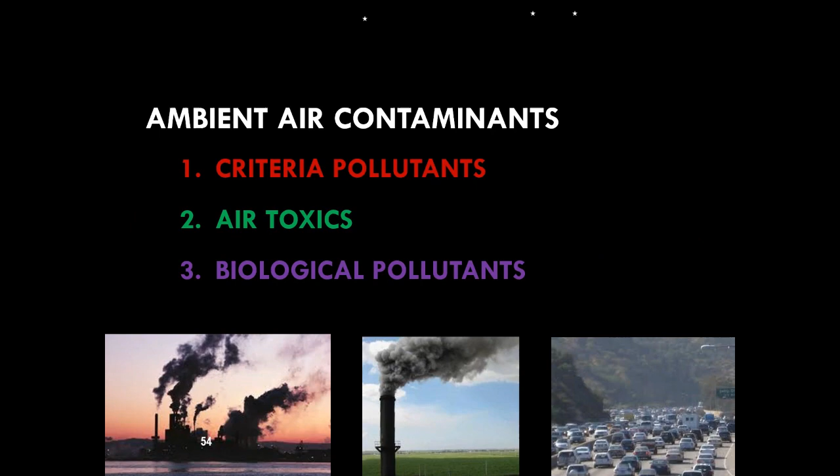So criteria air pollutants, these are air pollutants that have been regulated and are used as indicators of air quality. They are generally widely distributed across the country. So we have carbon monoxide, lead, nitrogen dioxide, ozone, particles or total suspended particles or TSP, and sulfur dioxide. So these are the indicators of air quality here in the Philippines.

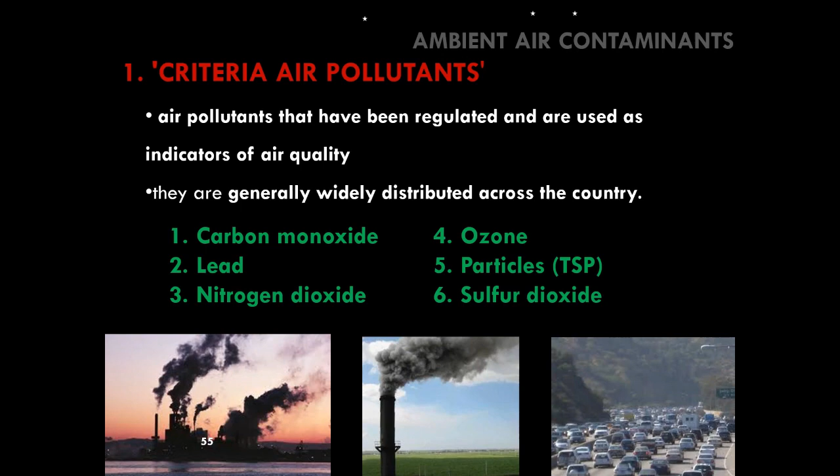Now, how do we describe particulate matter? So we know that human hair has a very small diameter, so it is actually 50 to 70 microns or micrometers in diameter. Also, fine beach sand has a 90 micron diameter. Now, we have two types of particles. We have PM2.5 and we have PM10.

So, PM2.5 are combustion particles, organic compounds, metals, etc. It has a diameter of 2.5 microns or less. While PM10, or particulate matter 10, are those of dust, pollen, mold, etc. Those have 10 microns in diameter.

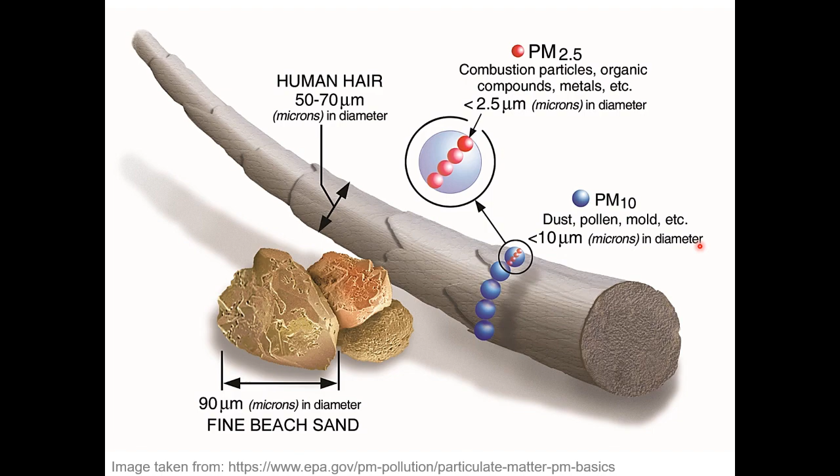So we also have air toxics. This is referred to as hazardous air pollutants. It can lead to an increase in the incidence of cancer, birth defects, genetic damage, central nervous system defects, immunodeficiency, and disorders of the respiratory and nervous system.

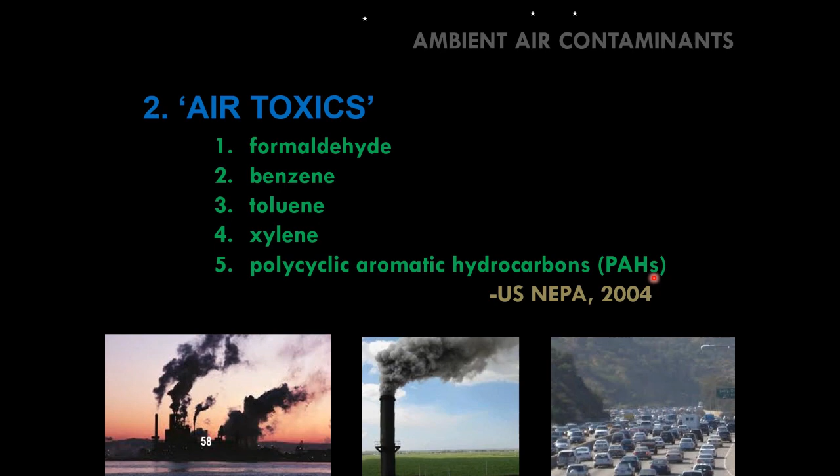So I've mentioned a while ago how sulfur dioxide can also cause irritation to the lungs as it forms sulfuric acid. So this is also an air toxic. But these air toxics are what is being monitored: formaldehyde, benzene, toluene, xylene, and polycyclic aromatic hydrocarbons or PAH. This is according to US NEPA.

Next, we have biological pollutants. So from microbiological contamination like molds, the skin of animals and humans, and the remains and droppings of pests such as cockroaches. These can be airborne and can have a significant impact on indoor air quality. So we know that molds actually can cause irritation to the nose and such.

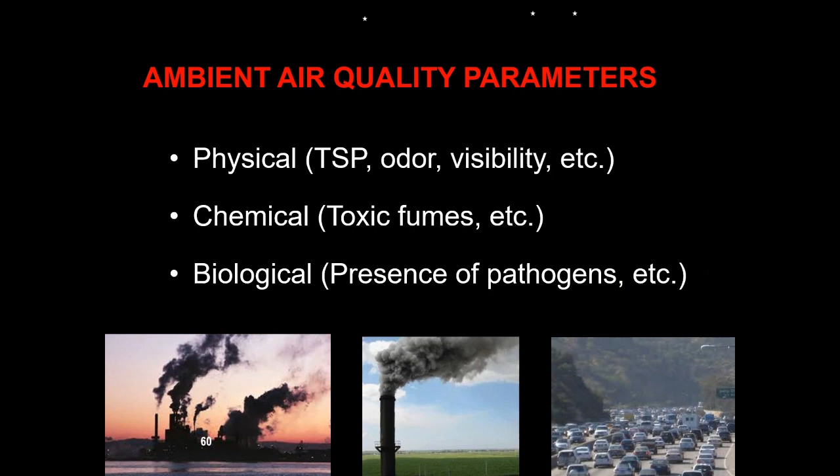So what are the ambient air quality parameters? What are we looking at when we check for ambient air? We have physical, chemical, and biological. In the physical, we have the TSP or total suspended particles, the odor, and the visibility. In the chemical, we have toxic fumes, etc. And in biological, we have the presence of pathogens. So that's it for ambient air quality parameters.

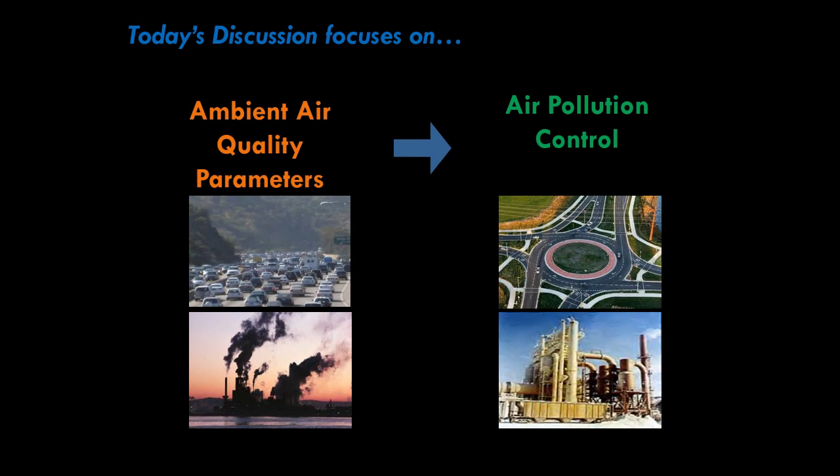Now let's move on to the control of air pollution. Most air pollution control mechanisms are designed for gaseous pollutants and particulates. So in large-scale industries, air pollution is controlled on the basis of the design. The design is based on gaseous pollutants and particulates.

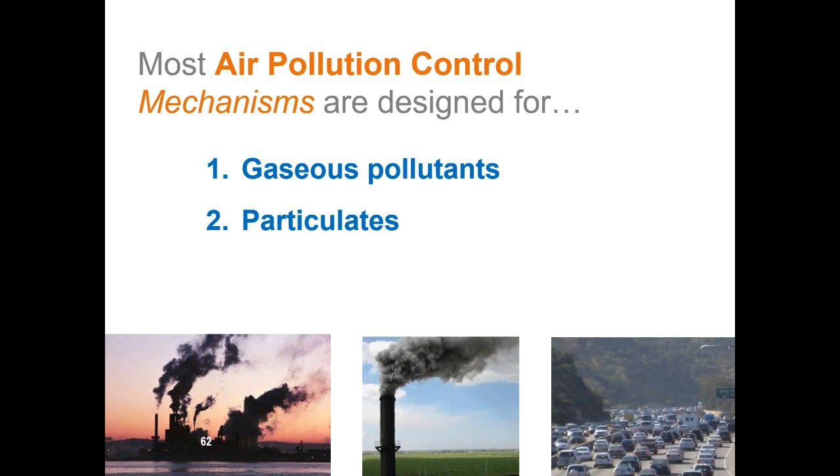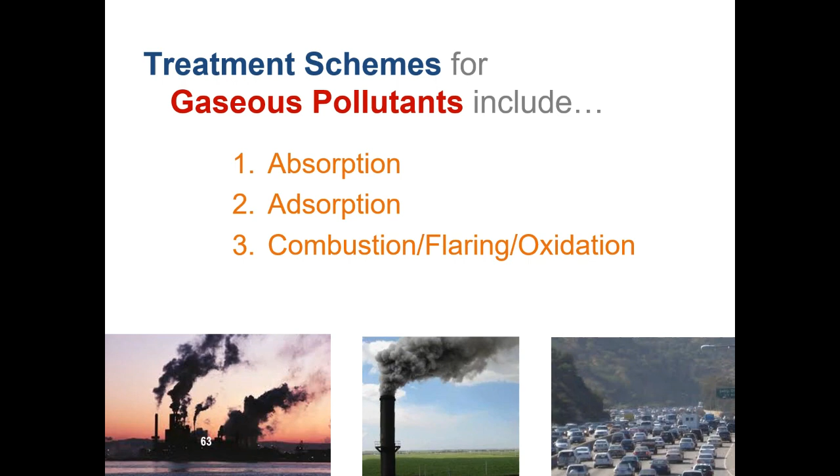So treatment schemes for gaseous pollutants include absorption, adsorption, and combustion, flaring, or oxidation. So gas absorption is a unit operation to separate gases by washing or scrubbing a gas mixture with a suitable liquid or a scrubbing liquid.

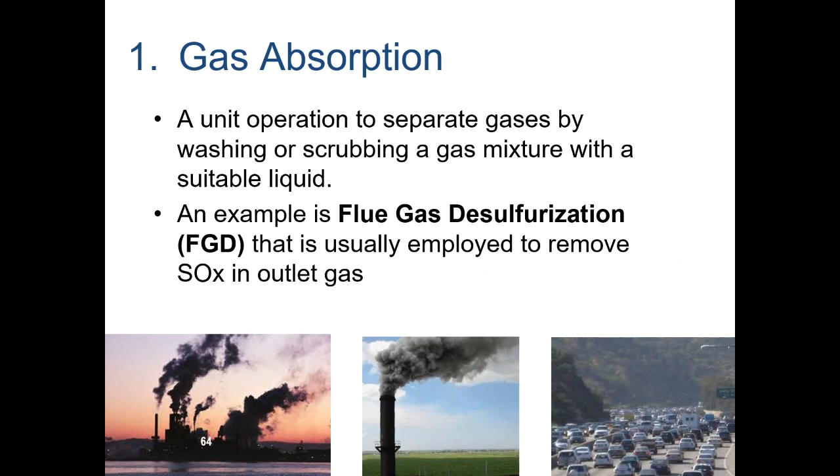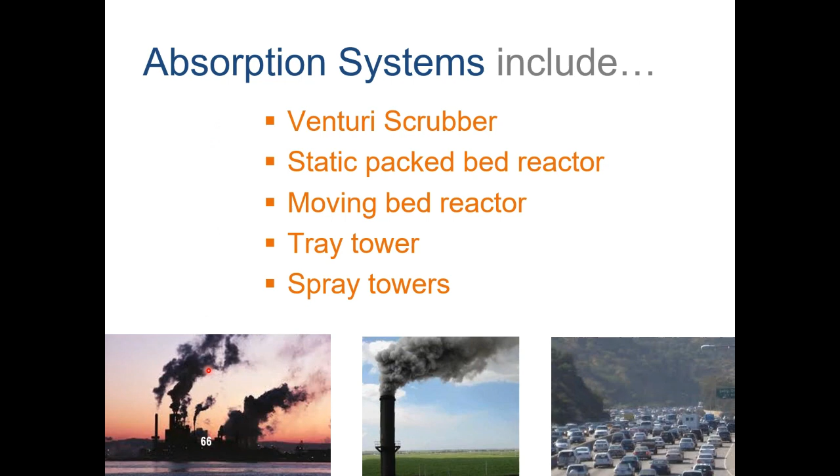So the absorption systems include the Venturi scrubber, static packed bed reactor, moving bed reactor, tray towers, and spray towers. I think you are familiar with these. You can find these in chemical industries or manufacturing plants, usually those that have gaseous byproducts. So let me show you a Venturi scrubber.

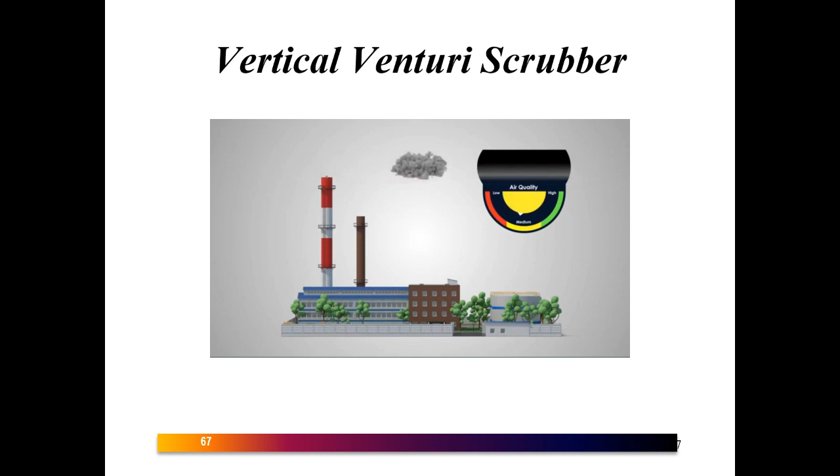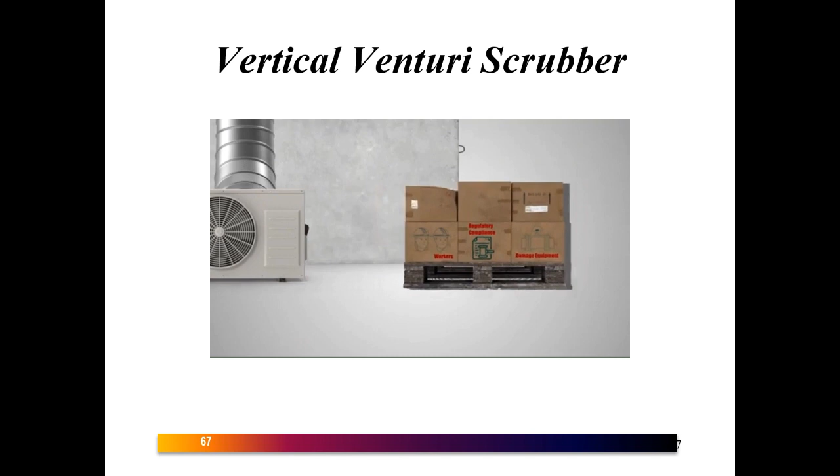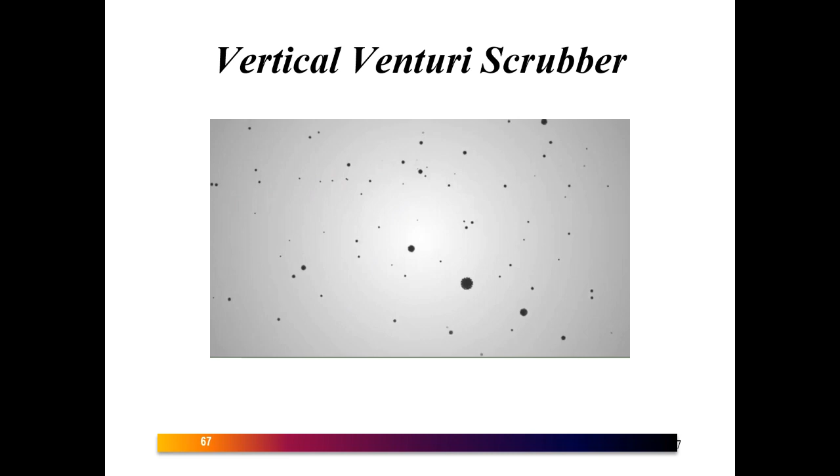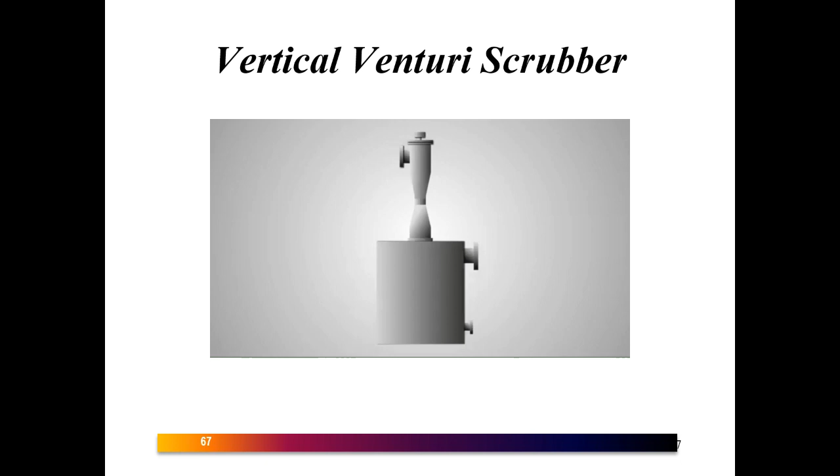Venturi scrubber. Air quality control is important to the success of every business, especially ones with industrial applications. The best way to maintain a high level of air quality is by using dust collection equipment. Dust collection equipment improves air quality in your facilities by removing harmful pollutants that can endanger workers, put your regulatory compliance at risk, and damage equipment. Air quality solutions have moved beyond typical dry dust collection, using the inherent properties of the impaction process to create wet scrubbers. Wet scrubbers rely on scrubbing fluid to remove dust from an air or gas stream. One of the most powerful and widely used types of wet scrubber is the Venturi scrubber. While Venturi devices have been used for over 100 years to measure and record fluid flow, it wasn't until the late 1940s that engineers learned to use Venturi design to efficiently remove particles from airstreams.

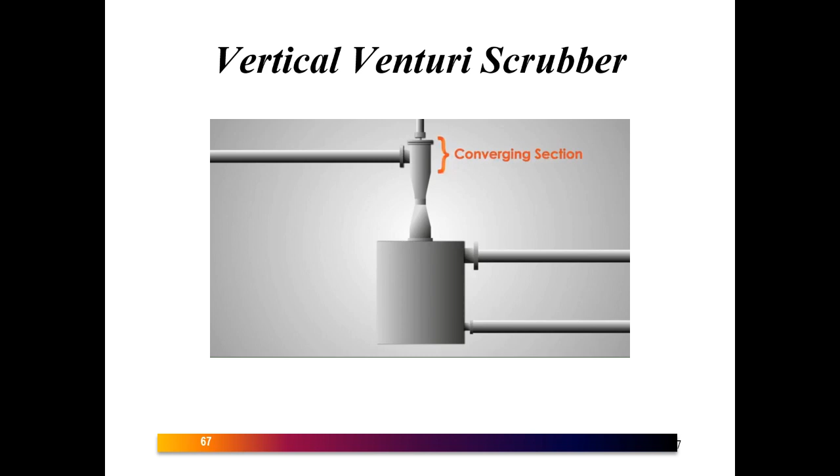Venturis are able to do so through their hydro-friendly designs. In order to clean air, Venturi scrubbers use the differential between high-velocity dust particles and free-flowing fluid such as water to create contaminant entrapping water droplets. Venturi scrubbers are designed to efficiently remove fumes, dust, solids, and aerosols.

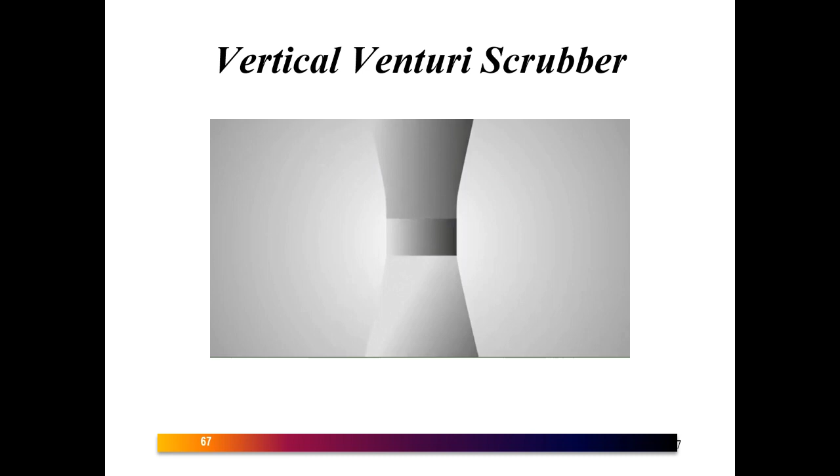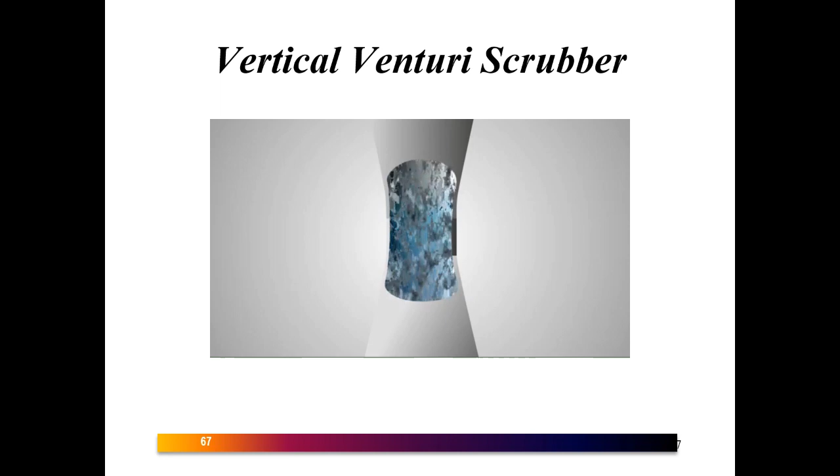The scrubbing liquid, most commonly water, comes into contact with the particulate-laden gas stream in a highly turbulent, high-velocity Venturi throat. As the droplets and particulate matter interact, they agglomerate in the diverging section of the Venturi. The entrained droplets, contaminated with the particulate matter, are removed from the gas stream by means of cyclonic separator. The cleaned gas exits the cyclonic separator, while the recovered scrubbing fluid is returned to a separate or integral tank

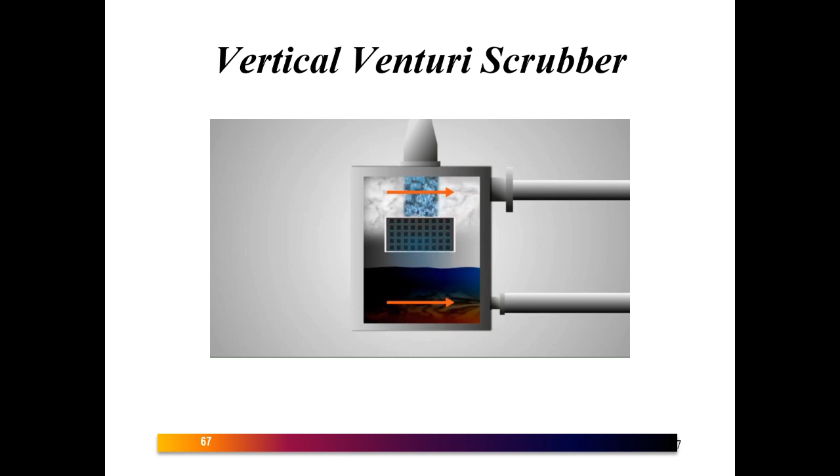for recirculation. By selecting the appropriate pressure drop, which is proportional to the throat velocity, efficiencies of over 99% can be achieved over a wide range of particle sizes. Although standardized in size and capacity, each individual unit is custom designed and engineered to meet the specific requirement of each application.

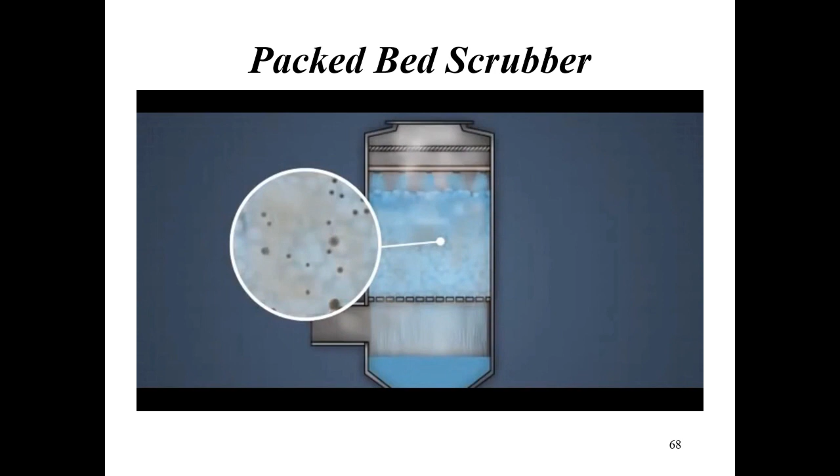As the gas passes up through the packing material, the particulate and gas molecules come in contact with the film of scrubbing liquid on the packing. The contaminated liquid drains down through the packing material, past a packing support, and out through the bottom of the tower. The gas stream flows out through the top of the packing material, past the nozzles, and through a mist eliminator before exiting the tower.

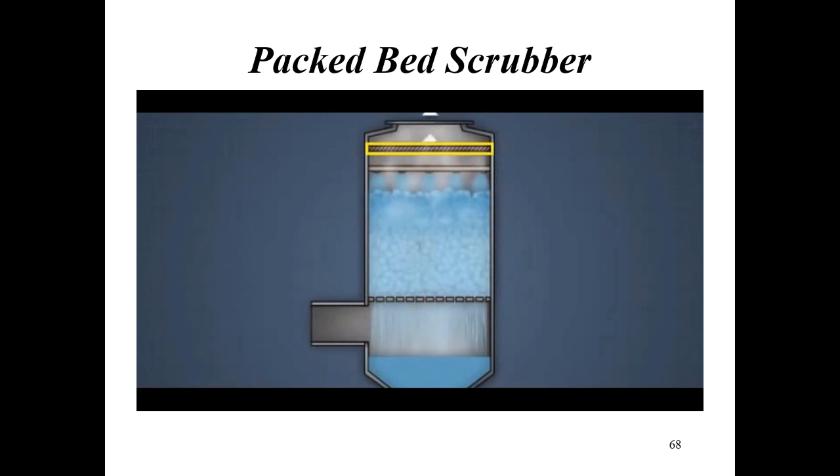So that was the packed bed reactor. Or scrubber, sorry, packed bed scrubber. So a packed bed scrubber can remove particulate matter as well as gaseous contaminants. I keep saying reactor. In a packed bed scrubber, as you can see here, there is a packing material. So this packing material also helps the gas to not only go straight, but it also traps particulates

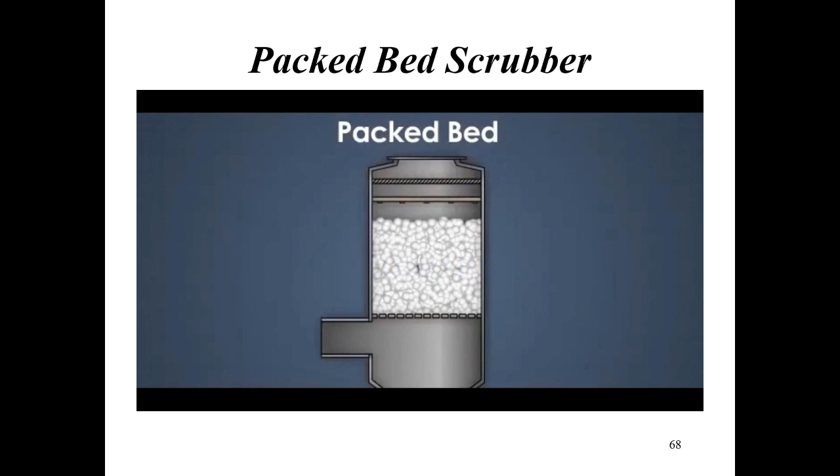in the packing material. It also creates a longer time for the gas to be soaked in the scrubbing liquid, since it has very many crevices and gas could travel in different ways through this packed bed. Alright, so that is a packed bed scrubber. So those are examples of gas absorption systems.

So next system is we have the adsorption of gases on solids. So what is adsorption? Adsorption is different from absorption. Adsorption is when particulates or any matter is stuck on the surface, only the surface, of a material. So an example would be activated carbon treatment. This is a popular air pollution control method.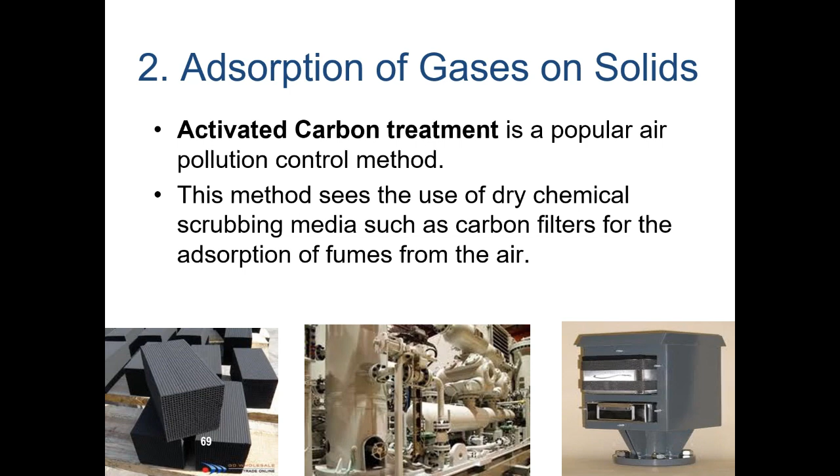So this method sees the use of dry chemical scrubbing media such as carbon filters for the adsorption of fumes from the air. So it uses dry chemical scrubbing media such as carbon filters. That's adsorption of gases on solids. So this is an example. This is a porous carbon. So vapor molecules over time, so they heat. All right. So vapor molecules go inside the crevices of a

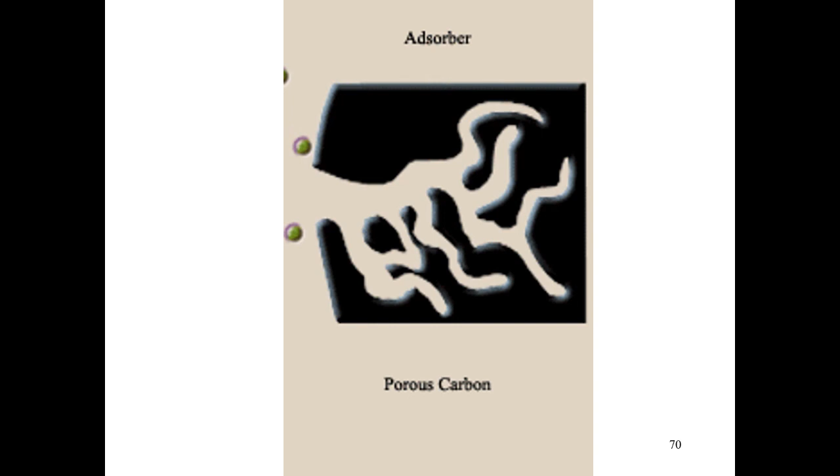carbon molecule. So the vapor also gets stuck inside, and once the crevices are full, heating the carbon is one way of cleaning it. You can also introduce steam to clean the carbon material, and it is ready to be used. So unlike absorption with the use of liquid scrubbers, this could actually be used again.

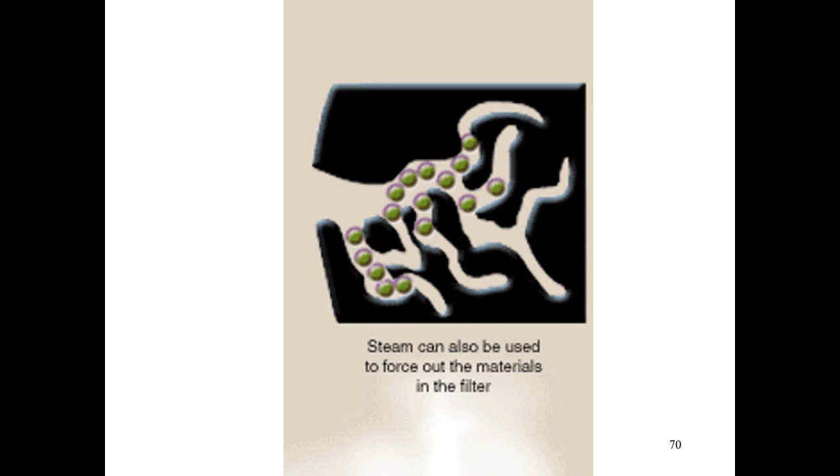Sometimes with the scrubbing liquid, it is hard to treat the scrubbing liquid again for it to be used. But some still do that. But in this case, like the activated carbon, you only steam it or heat it for it to regenerate. All right. So an example of the system would be a pressure swing adsorption.

Pressure swing adsorption processes utilize the fact that under high pressure, gases tend to be attracted to solid surfaces, or adsorbed. So the higher the pressure, the more gas is adsorbed. When the pressure is reduced, the gas is released, or desorbed. So PSA processes can be used to separate gases in a mixture because different gases tend to be attracted to different solid surfaces more or less strongly.

If a gas mixture, such as air, is passed under pressure through a vessel containing an adsorbent bed of zeolite that attracts nitrogen more strongly than oxygen, part or all of the nitrogen will stay in the bed. So we have two stages, adsorption and desorption. In adsorption, it's pressurization. Part or all of the nitrogen will stay in the bed, and the gas exiting the vessel will be richer in oxygen than the mixture entering.

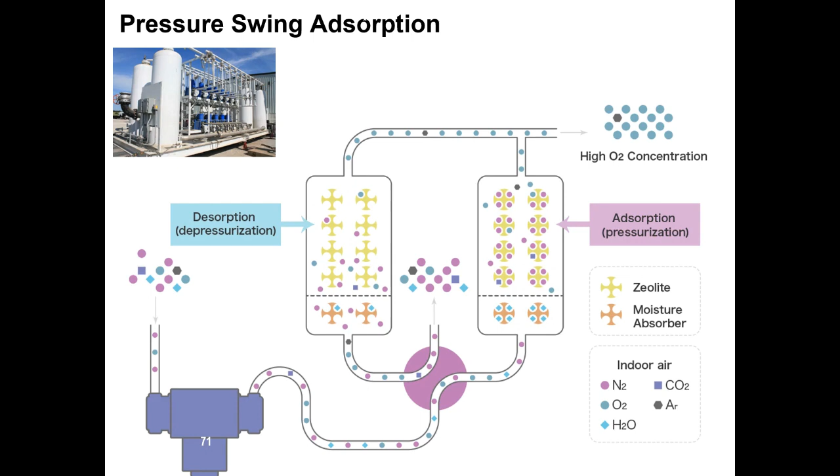So lastly, of the gaseous pollutant air pollution control, we have combustion or flaring. Flaring is a volatile organic compound combustion control process. It is only used when there are VOCs, in which the VOCs are piped to a remote location and burned in an open flame. Auxiliary fuel and steam or air promote mixing for nearly complete or 98% VOC destruction.

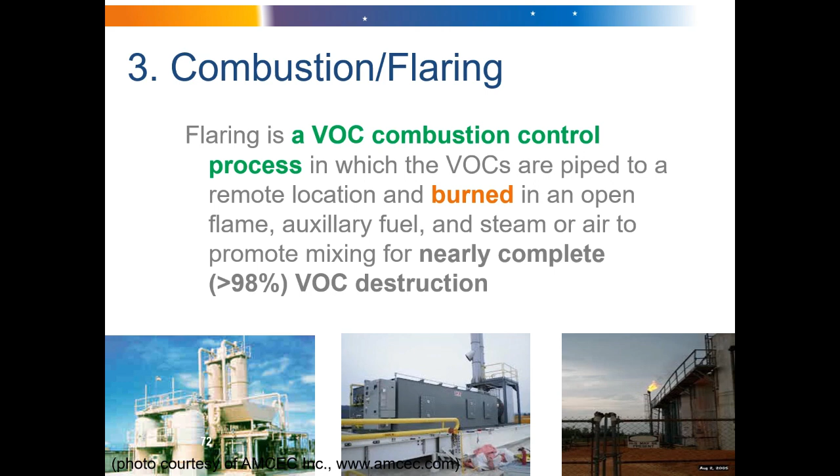So the combustion or flaring cannot be used to treat halogenated compounds. Halogens are chlorine, bromine, fluorine. The combustion and thereby the loss of VOCs produce nitrogen oxide emissions and is typically unacceptable as the only means of eliminating VOC from highly concentrated streams. So industries are now transitioning to different methods other than flaring or combustion.

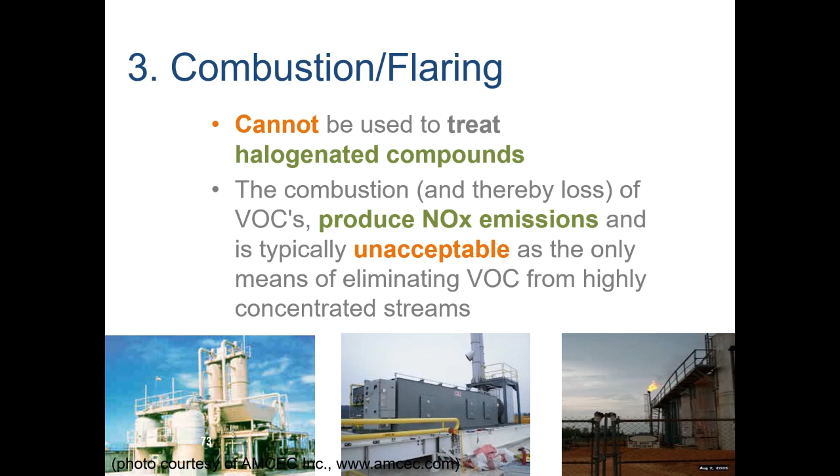You can still find these in old diesel plants. Those plants have VOCs as byproduct, so they flare. This is actually an example. This is what they do: gas or VOCs are combusted in an open flame. All right.

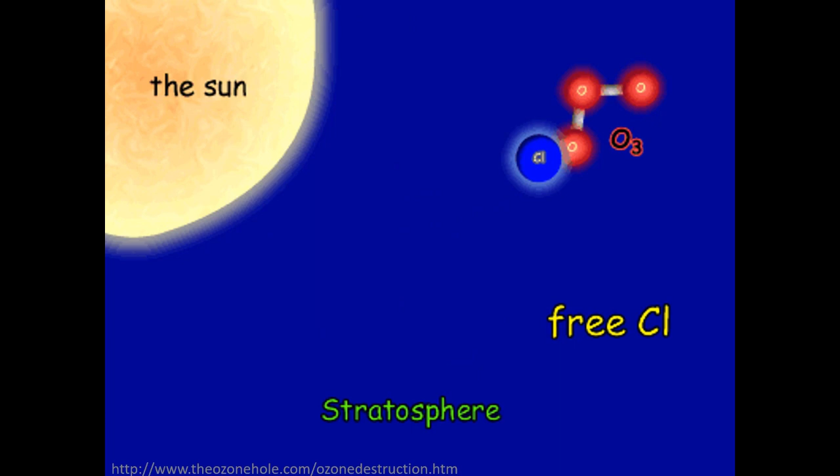So why do we not use flaring to treat halogenated compounds? We know that CFCs have chlorine in them. Basically, if you treat halogenated compounds, there will be a production of CFC. CFCs have chlorine, and this is how the ozone layer is destroyed. There would be a free chlorine in the atmosphere and it will bond to the O3. This chlorine atom will destroy different O3 or ozone compounds with just one free chlorine. This is actually dangerous. That's why flaring is not used to treat halogenated compounds.

So this is how the ozone layer is destroyed. UV radiation interacts with a CFC molecule, stripping off a chlorine atom, and there will be a free chlorine in the atmosphere. The Cl atom strikes an O3 molecule resulting in an O2 molecule and a chlorine monoxide molecule. So the free chlorine bonds with one oxygen to form chlorine monoxide and oxygen, or O2.

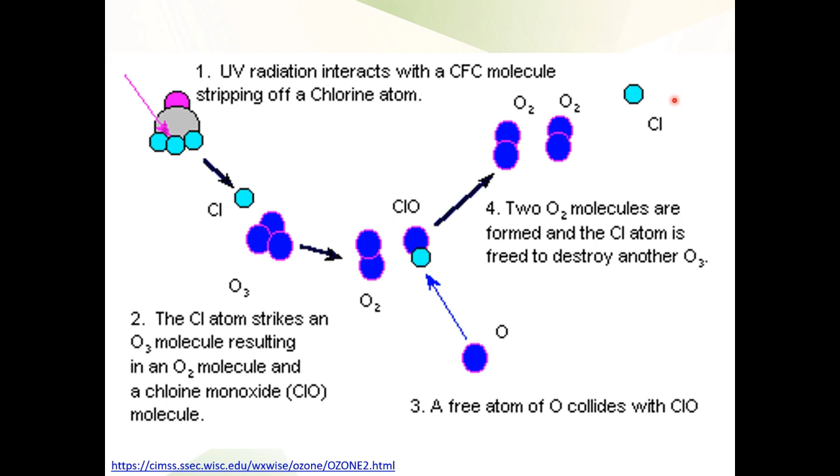A free atom of oxygen collides with chlorine monoxide, and it also forms O2, and the chlorine is now a free chlorine and will find another O3 molecule. All right, so that's the danger. That is why it is not recommended for halogenated compounds.

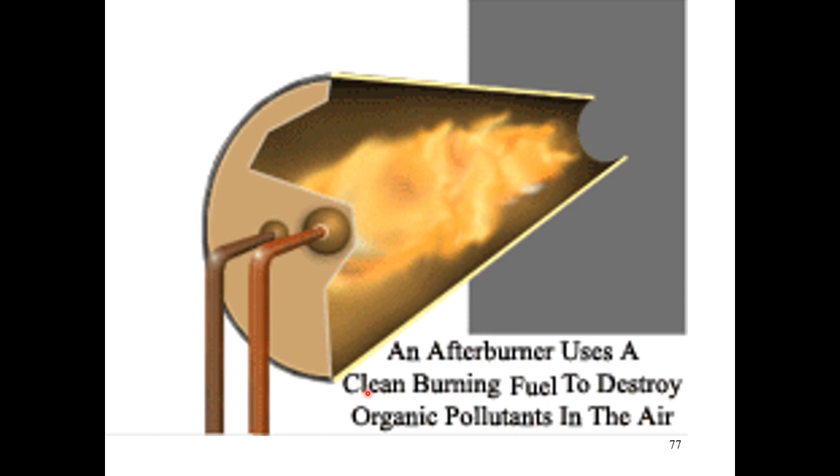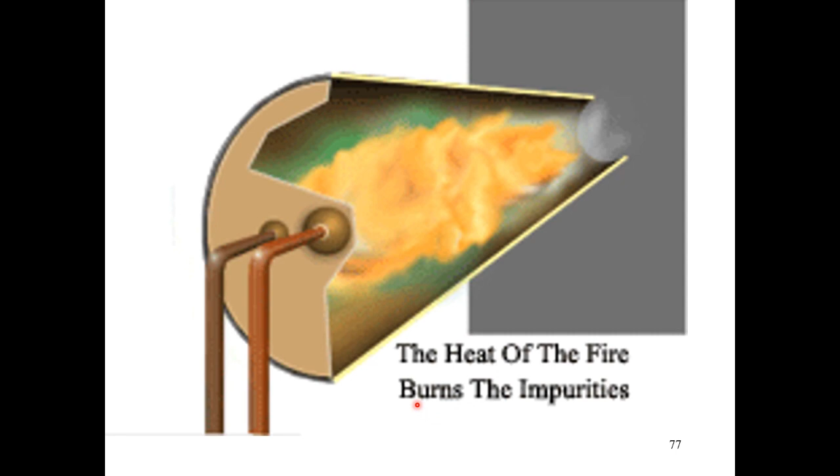So this is the afterburner. An afterburner uses a clean burning fuel to destroy organic pollutants. Fumes or vapors are passed through a jet of fire. This actually burns the impurities.

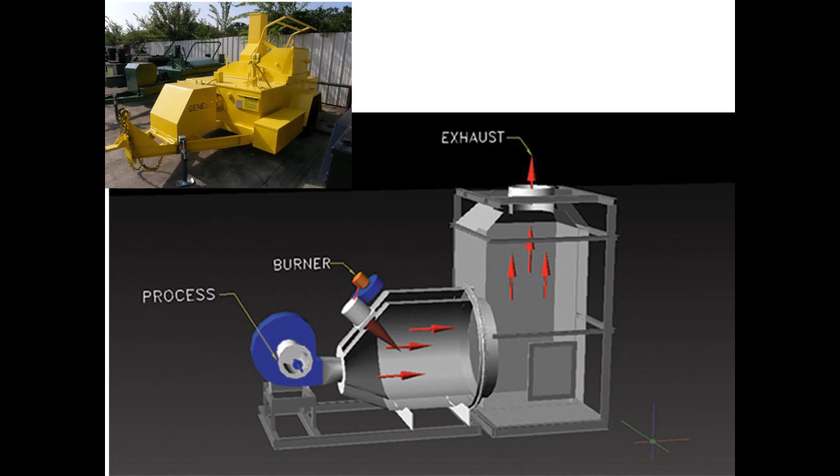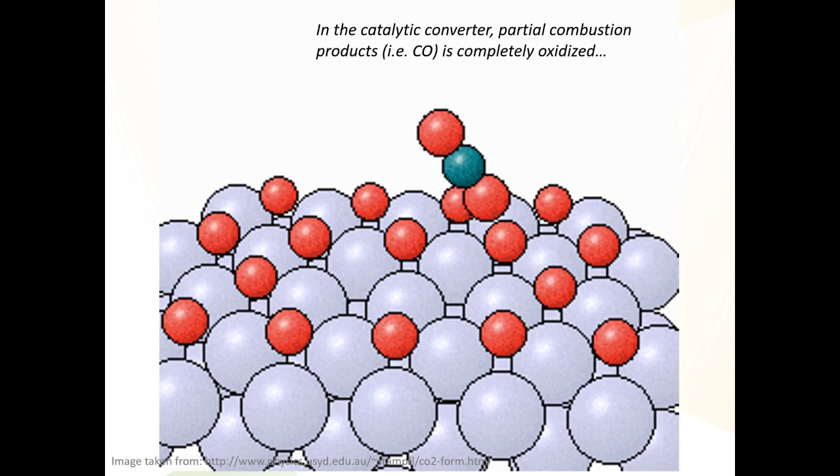All right, so this is a catalytic converter. Actually in a car, there is a catalytic converter. It works the same in the car, where gas or diesel or fuel is burned within the converter. In the catalytic converter, partial combustion products or carbon monoxide are completely oxidized. So this is also a form of combustion. So that's it for gaseous pollutants.

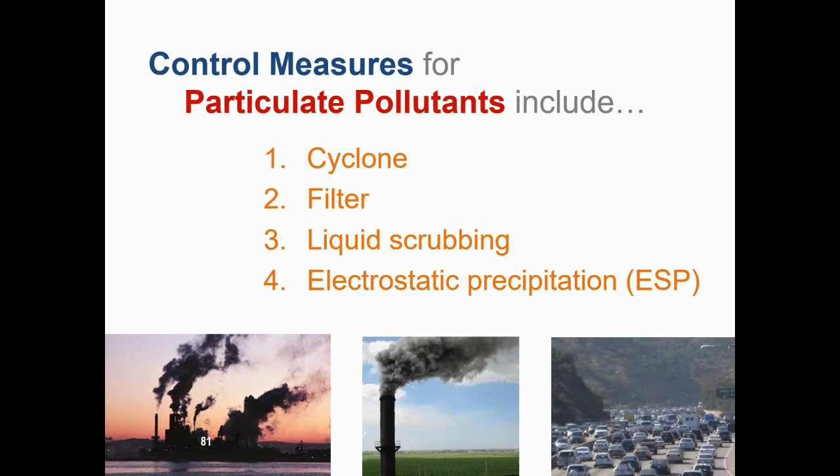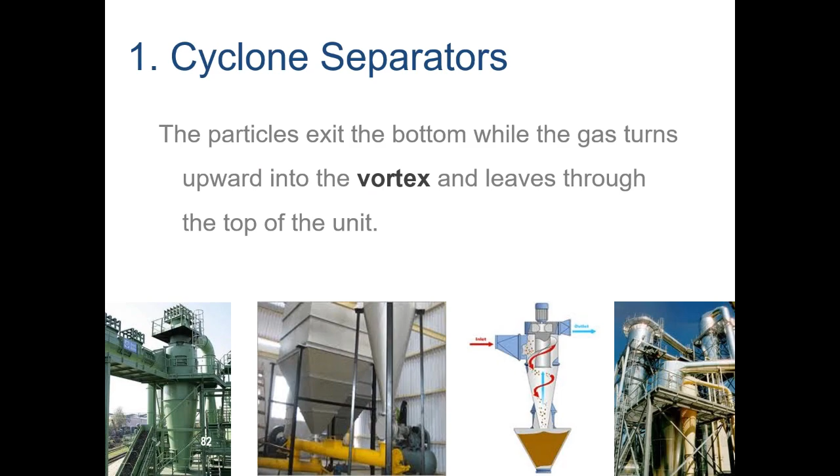Now we have control measures for particulate pollutants. These include cyclone, filter, liquid scrubbing, and electrostatic precipitation. So cyclone separators: the particles exit the bottom while the gas turns upward into the vortex and leaves through the top of the unit. This is a cyclone separator. As you can see, the yellow particles are the particulates and the gray particles are the gas.

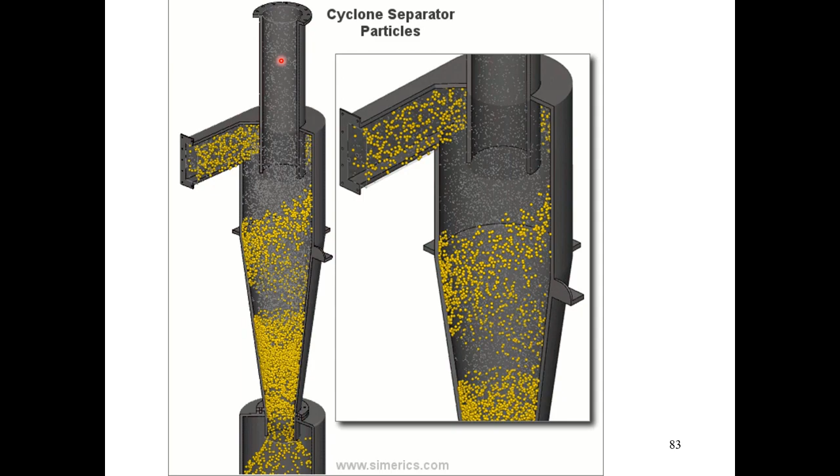To separate, there would be a vortex at the center. The particulate matter, being heavier, goes down the cyclone, while the gas, being light, will eventually go up, since gases always go up. So the gas goes up, leaving with no particulate matter.

Next, we have the air filtration. A device composed of fibrous materials which removes solid particulates such as dust, pollen, mold, and bacteria from the air. This was actually very famous during the COVID-19 pandemic. Many people were buying air filtration devices for their homes.

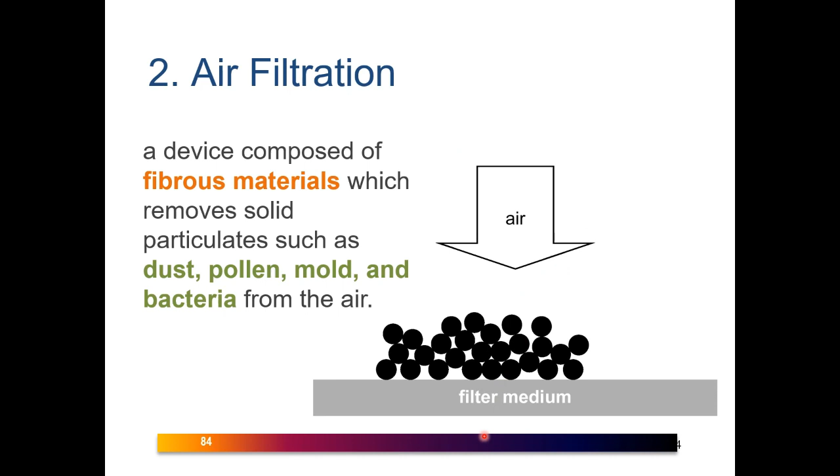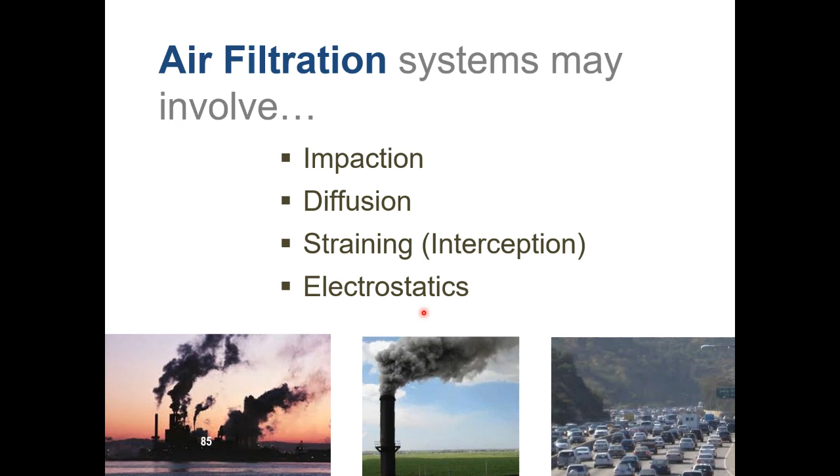Basically, the air filtration has a filter medium, a fibrous material, and air is passed through that fibrous material, and this is where the dust, pollen, mold, or bacteria or viruses like COVID-19 are filtered from the air. Air filtration systems may involve impaction, diffusion, straining, or interception, and electrostatics. So how do air filters work?

How do filters remove particles from the air? It's tempting to think of air filters as microscopically small versions of kitchen sieves which block large particles from getting through while letting small ones past. As we'll see though, this picture is rather misleading.

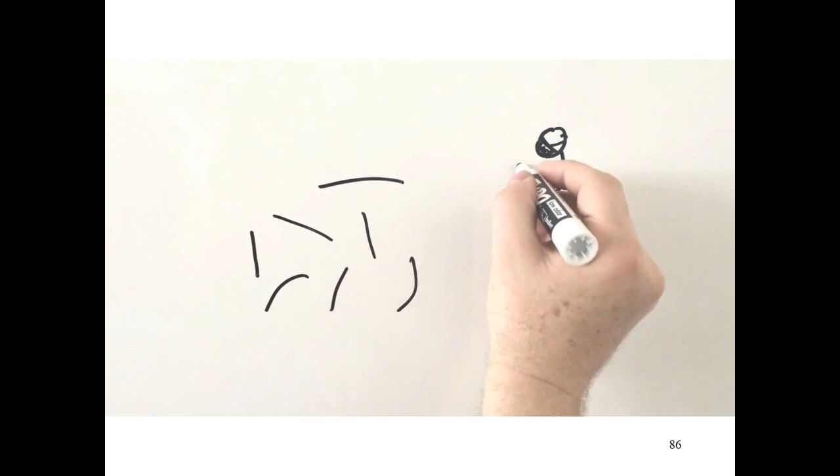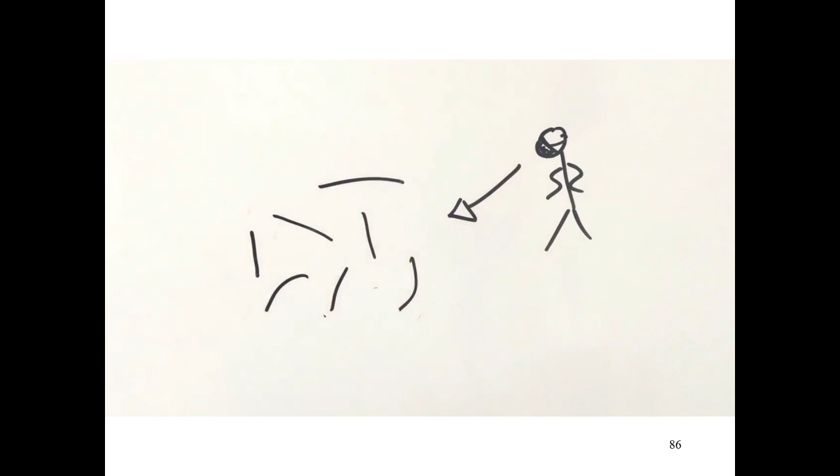Many types of air filters are made from tangled bundles of fine fibres. Together, these create narrow, convoluted pathways for the air to pass through them. For the really large particles, these filters actually do behave a little bit like a kitchen sieve by physically blocking the particles from getting through, but this is pretty much where comparisons with sieves end.

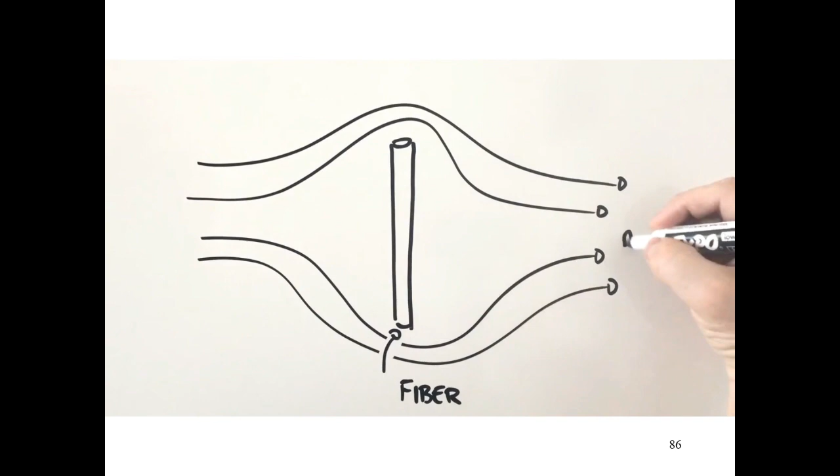To understand why, imagine for a moment a car speeding along a winding road. The car fits easily on the road, but if it's going too fast, it won't be able to navigate the bends, and you just know that at some point it's going to crash. It's the same for small particles speeding through an air filter. As the air twists and turns, the particles can't keep up, and ultimately they end up crashing out and being caught. Because of their inertia, which just like the car depends on how massive they are and how fast they're going, they can't stay the course.

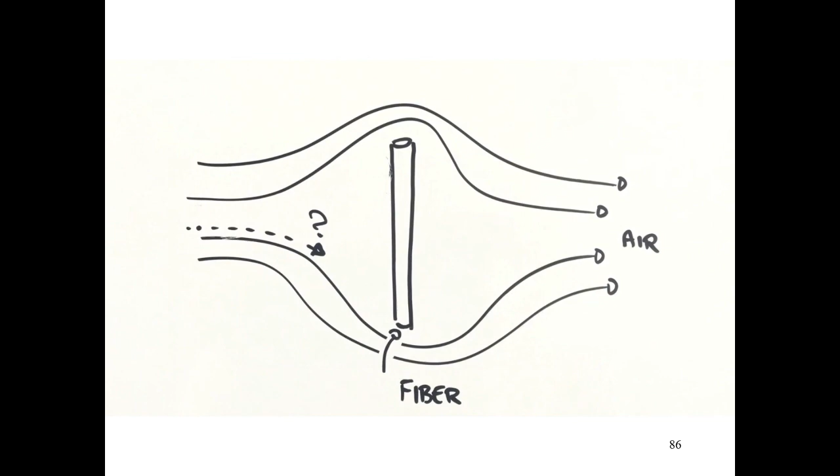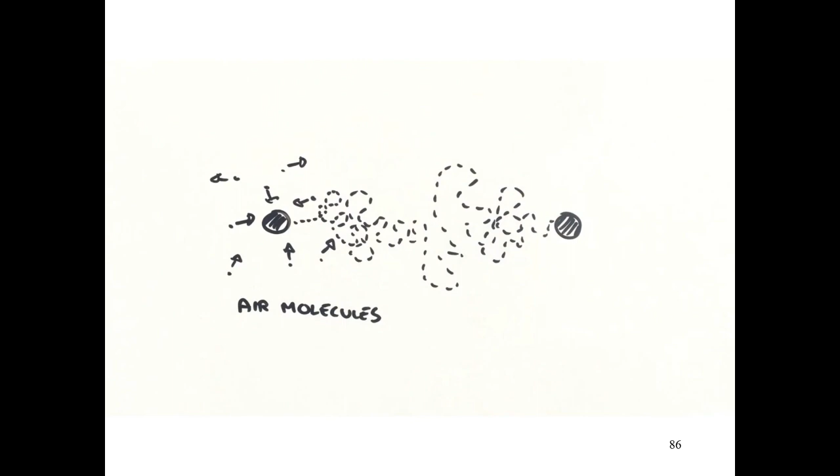But what about the smallest, lightest particles, those that can easily slip along the winding path the air takes? Amazingly, these are also captured efficiently, but for a very different reason. Because these particles are so small, they have very, very little inertia, and they dance around as they're bombarded by the air molecules around them. This rather unusual behaviour is called Brownian motion after the first person to observe it, and as they dance, they end up colliding with the filter and being captured.

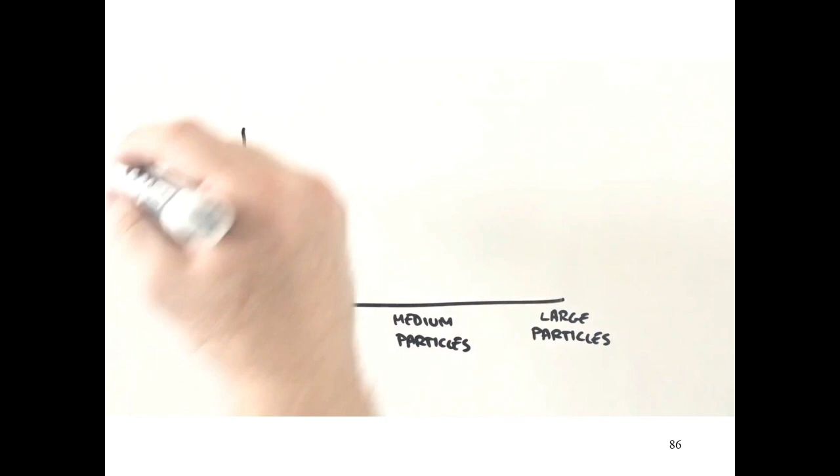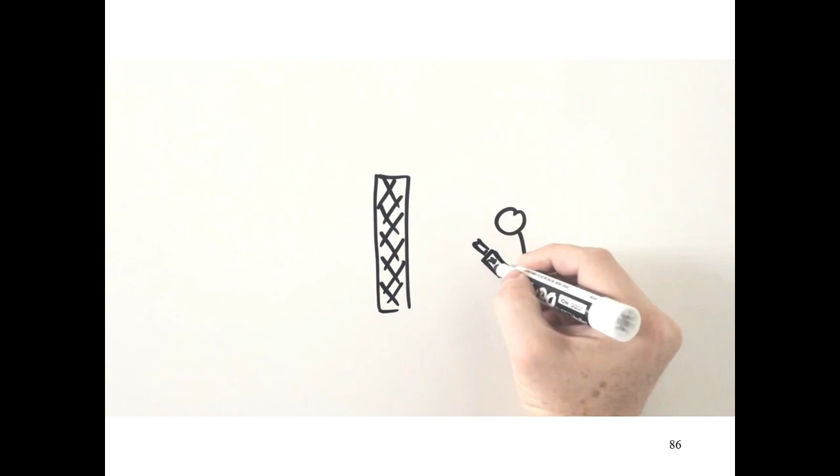So at the end of the day, it's not the smallest airborne particles that are the hardest to filter out, but the medium-sized ones, those that are too small to be captured through inertia, but too large to be captured through Brownian motion. And this is why, when manufacturers design and test air filters, they don't use the largest particles or the smallest ones, but they use the middle-sized ones, those particles that are just the right size to slip through and make it to the other side.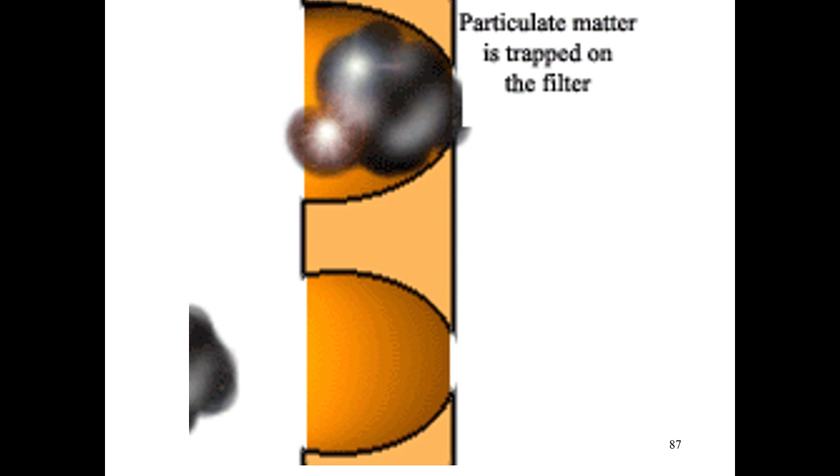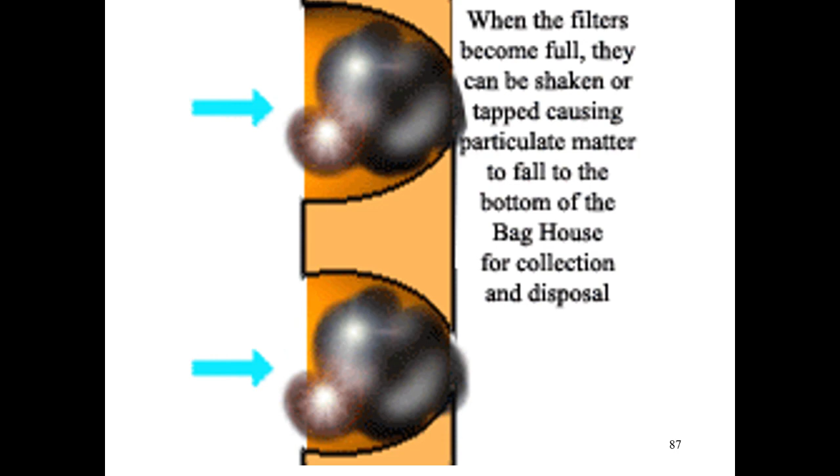So in time, the particulate matter will be blocking these filters, so they become full and they can be shaken or tapped, causing particulate matter to fall at the bottom of the baghouse for collection and disposal. Alright, so you will see these baghouses in feed mills, since there is a lot of particulate matter that will escape through the air, since the nature of feed mills is the use of powders and meals and stuff. So you can see baghouses there.

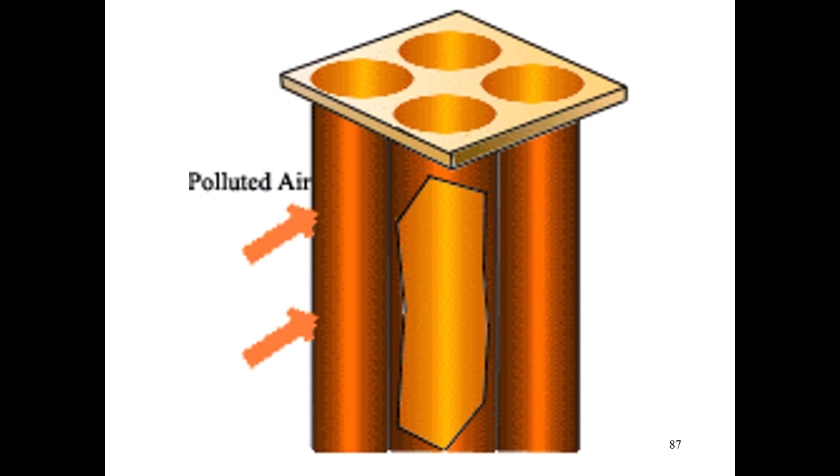So I've mentioned earlier the Venturi liquid scrubber and the packed bed scrubber. These liquid scrubbers also remove particulate matter in gases. That's why liquid scrubbers are widely used in manufacturing plants, because they do not only remove gaseous pollutants, but they also remove particulate matter.

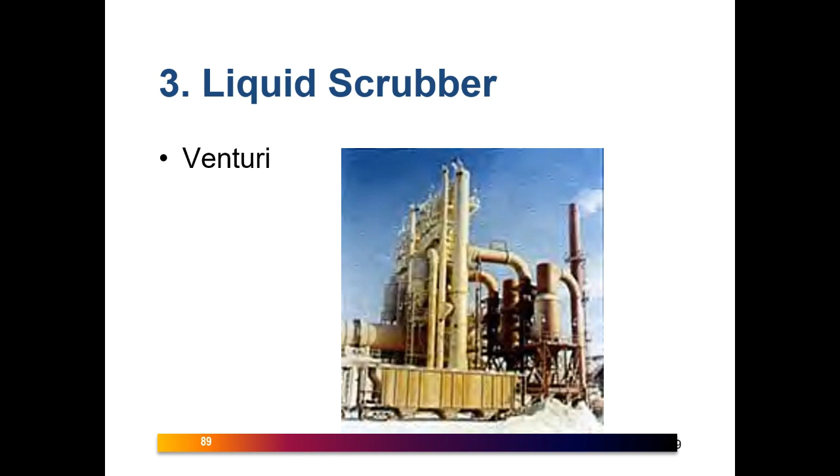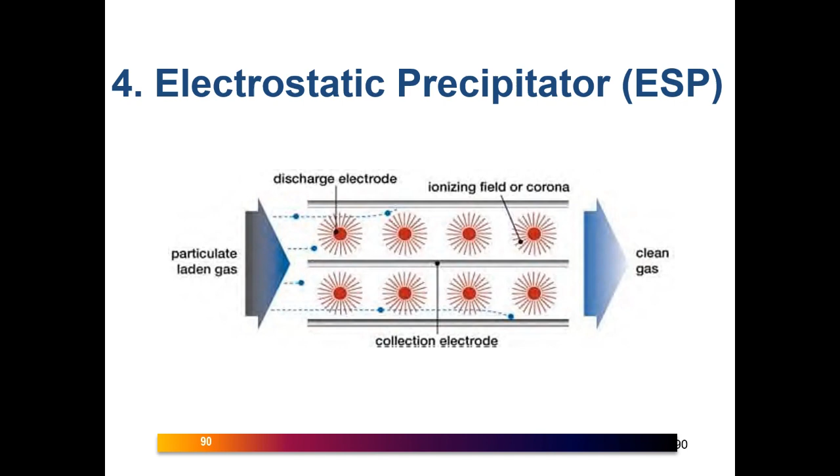So lastly, we have the electrostatic precipitator. So how does an electrostatic precipitator work? Watch this video to understand.

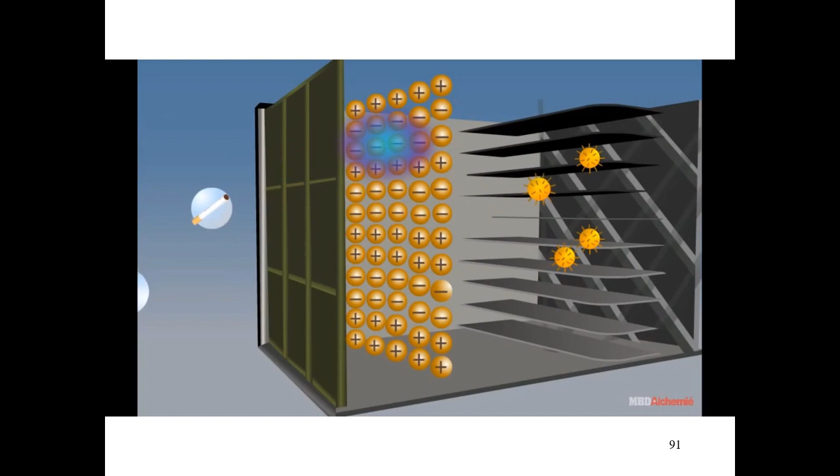Electrostatic precipitator. The carbon and other dust particles released in the atmosphere from industries are removed by electrostatic precipitator. In this method, two electrodes are fitted against the inside walls of the smokestack. When high voltage is applied, an electric discharge takes place across the stack, and as a result, air in the stack is ionized. The ionized air consists of ions and free electrons.

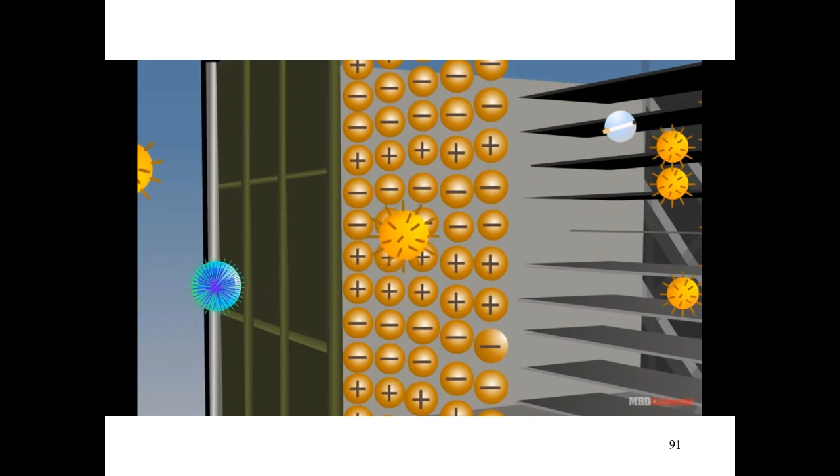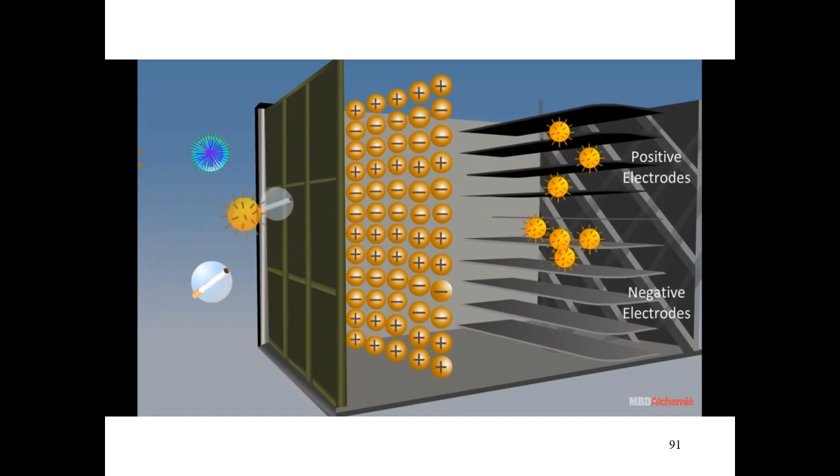The free electrons get attached to the gaseous particles moving up the stack. The particles get negatively charged and are attracted to the positive electrode located on the inner wall of the stack and settle down there. These can be dislodged from the electrodes by vibration of the electrodes and are collected in a reservoir. In this way, about 99% of the particulate matter gets removed from the flue gases.

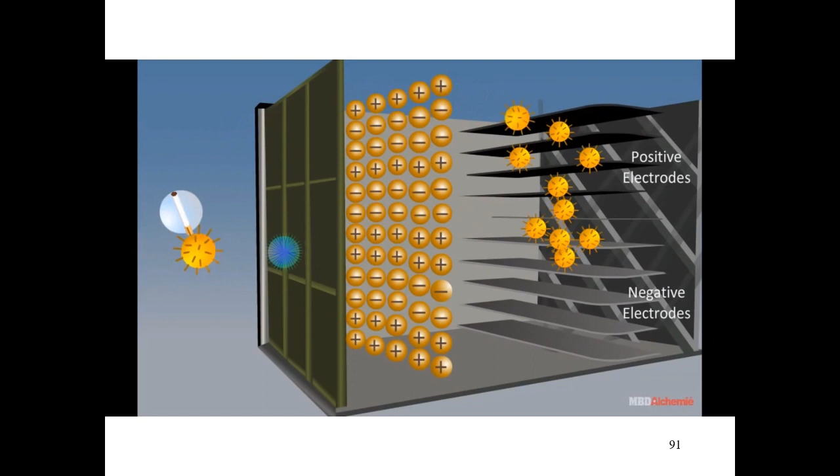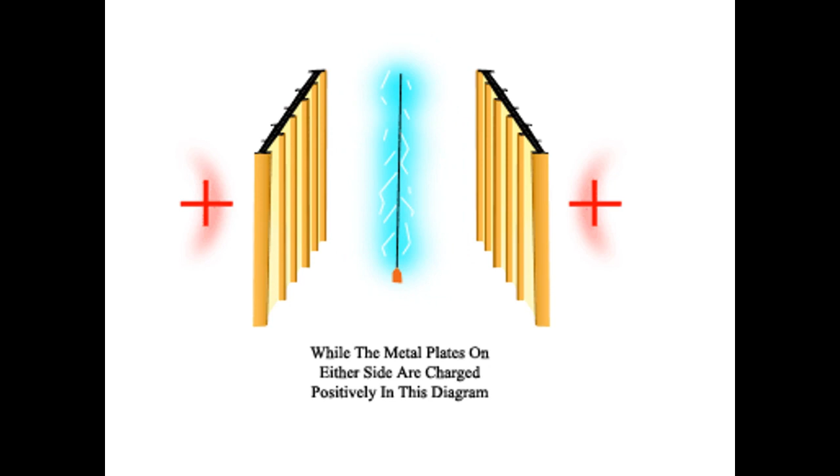So that's how an electrostatic precipitator works. So basically, it negatively charges air. So voltage is sent through an electrode, while the metal plates on either side are charged with positive particles. So since the air is charged with negative particles, it is attracted to positive electrodes, leaving the gas with no particulate matter.

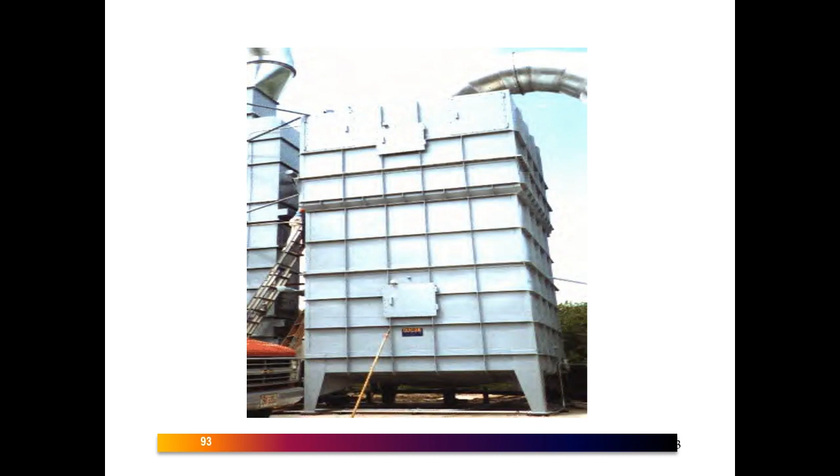So this is an example of an electrostatic precipitator. There are electrodes inside of this equipment. Okay, so that's all for air pollution control.